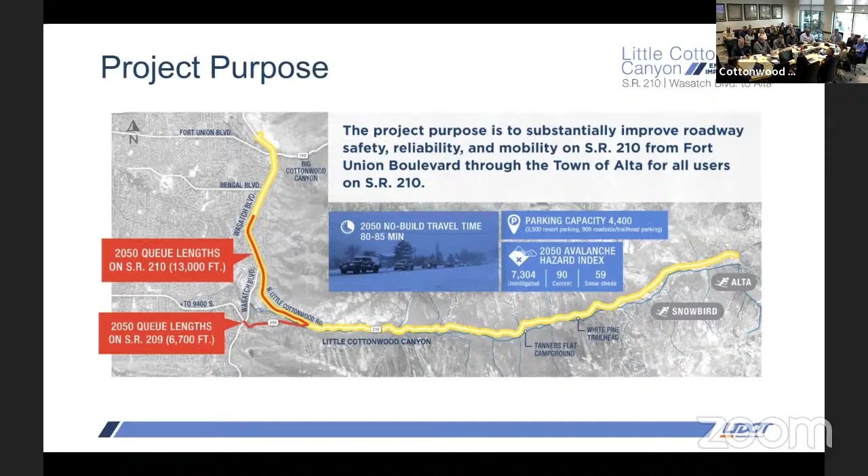I think you're familiar with the 5 alternatives that were proposed and analyzed in the draft. I think it's important to note that these were all measured off of a no action alternative, right? So if traffic continued to grow, population growth, but there were no mitigating activities. So that's really what we compared it against.

On the draft, we got over 14,000 comments. I personally read every single one of them. We responded to every single one of those. Those are all included in the draft. Overall, there was close to 80,000 different comment codes that were used. I mean, obviously some of them were used repeatedly, but about 80,000 comments that warranted response over 14,000 submittals. And the two that I really want to point out were, one, support for tolling. I was pleasantly surprised by the support for tolling in the canyon. And then the second one was support for phased implementation.

Some of the revisions, I just want to go over this quickly so people know what changed from the draft to final. The two bus alternatives: there will now be a bus stop located at entry 1 near the Creekside Lodge. It's basically right where the existing UTA stop is. It's really just a shed now. This would be an enclosed building with locker space, a place to put your boots on, get warm, store your lunch, and honestly wait for a bus down at the end of the day.

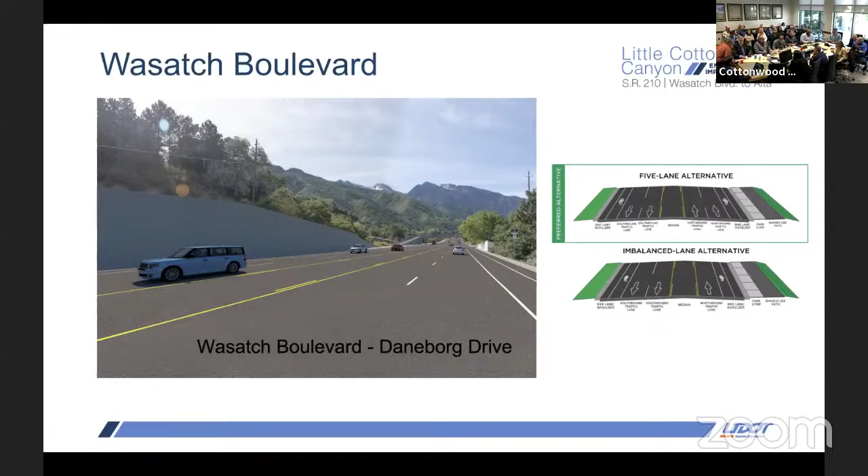Avalanche mitigation. I'll go through this pretty quickly. Anybody who's a skier knows that Little Cottonwood is one of the most dangerous roads in North America, unmitigated. On average, it has a closure of 56 hours per year, and that's over about 11 days. So average closure is 4 to 5 hours. Last year, we had a pretty calm year. The 2 prior years, we had individual closures in excess of 60 hours, right?

It was unfortunate that we had a Snowbird ski patroller that had some problems during one of those. I compliment the emergency services that got him to where he needed to be. But this is a real hazard. We've heard the Alta's running out of food story, right? I mean, these long duration closures have an impact for the canyon.

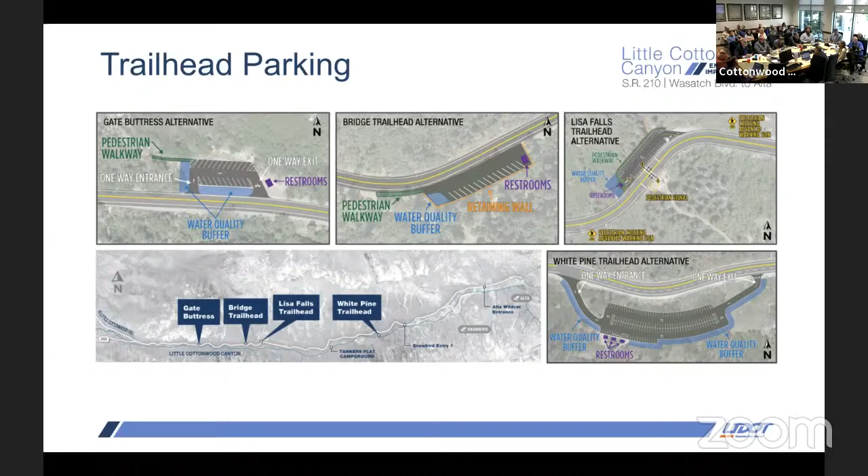Trailhead parking. So we are proposing to improve 4 trailhead parking lots. These are the Gate Buttress, Lisa Falls, White Pine, which is going to nearly triple in its total capacity, and a new one called the Bridge. As part of this, we would eliminate roadside parking within a 1/4 mile of these locations. They'll include water quality buffers, parking in stalls. If you're familiar with what the new Grit Mill looks like, imagine more like that.

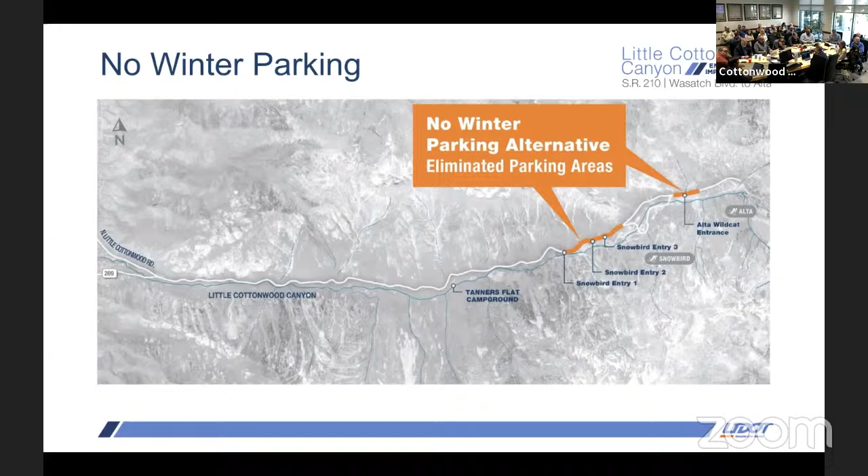Really reduces erosion and improves water quality. That being said, it also reduces a couple of stalls. Not much, 528 total to 511. Eliminating parking in the upper canyon. This is really roadside parking parallel to the white line between Snowbird Entry 1 and Entry 4, and then around the Wildcat area.

Public comment period. We have 13 days left. October 17th is the end of the public comment period. As of this morning, we've received 5,353 comments. I have not read them all. Please don't ask me to say what the prevalent theme is in this. You heard me say that yesterday, Mayor. I don't think that's fair. One, they haven't all been submitted, and two, I haven't even read all the ones that have been submitted. So we will compile some themes once the comment period is over.

But please, as citizens, as a city, take some time to formulate your thoughts. What we may have missed, what's wrong with our analysis, what can be done better. I do want to emphasize that this is not a vote, right? This isn't a ballot referendum. This is an opportunity to improve the process and come up with the best alternative that we can.

Moving forward, this is my last slide. The comment period will end on the 17th, after which we will read, review, consider all those comments. We will make any changes that are required as part of those comments, any additional evaluation, engineering, whatever we need to do. And we anticipate releasing a record of decision, which is the final step in the EIS process, really around the end of ski season.

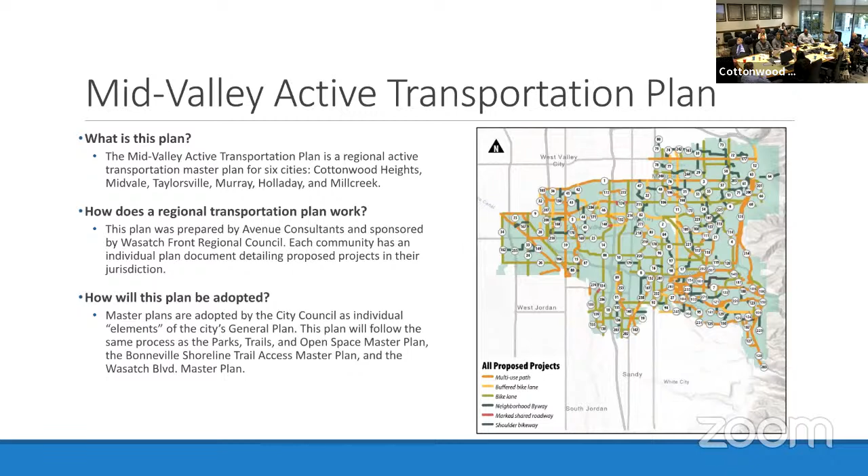And I want to go to this picture here. It's kind of hard to see with this kind of mess of lines here, but you can see Cottonwood Heights compared to some of these other cities. We have a pretty dense network of recommended bike lanes. So it's pretty extensive. I'd say our city is well represented in this plan, which is good. And you'll already notice, while some cities have adopted, we're still in the process of it.

We've proposed recent grant funding for some of these backbone networks, which we talked about at the last meeting, which is that Union Park, kind of Fort Union cycle track improvement, Highland Drive to Bengal. Those have been contemplated and partly awarded already and are under application again. And then Fort Union as well, we've seen some movement there. So having this plan in place will only help us continue to seek funding and try to prioritize implementing this.

You can describe multi-use. The orange one, that's one. Level 1. It's level 1. It's not necessarily strictly defined as one of these over the other, but it's something. It's a bike lane or a pathway that is on the road. Physically it may be on the roadway, but you can see those first two. One is a raised curb, so it's physically separated, or there's medians or planter barriers or something like that. There's a barrier between traffic and active transportation.

So right now, we do not have any of the cycle track at grade protected with parking. We're a mix of a little bit of buffered bike lane, a little bit of the bike lane in level 2, and then the shoulder, which as cyclists going on any one ride, you could experience all 3, actually all 5 of the ones on the left. Sure. At any given moment.

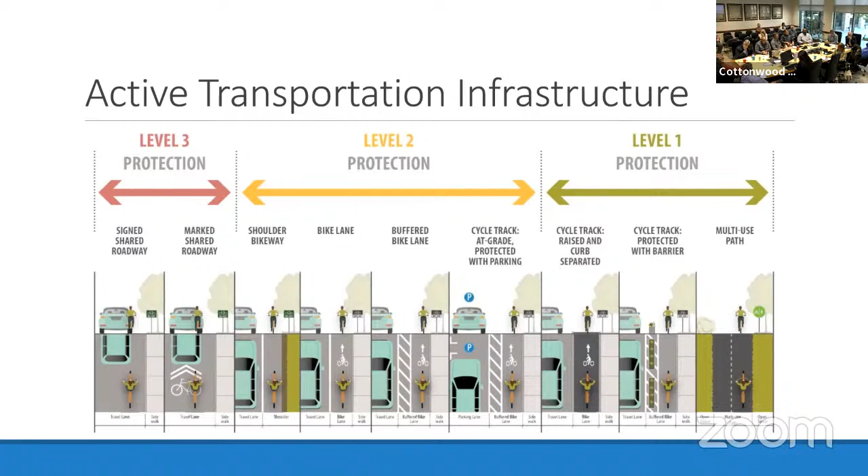Correct, and then at Brook Hill Drive, the other new development down there has that as well, which is just past the fire station to the east. And then, like I said, we have funding to pursue that and construct it between those 2 projects. It's a start, admittedly, but we are seeing that gain a little bit. Yeah, the Big Cottonwood Canyon Trail is a really good example that goes quite a ways. And then obviously the orange, that would be an orange line here. We're proposing orange lines in many different places in the city. So this is something that's maybe a more recent priority, but definitely a point of emphasis.

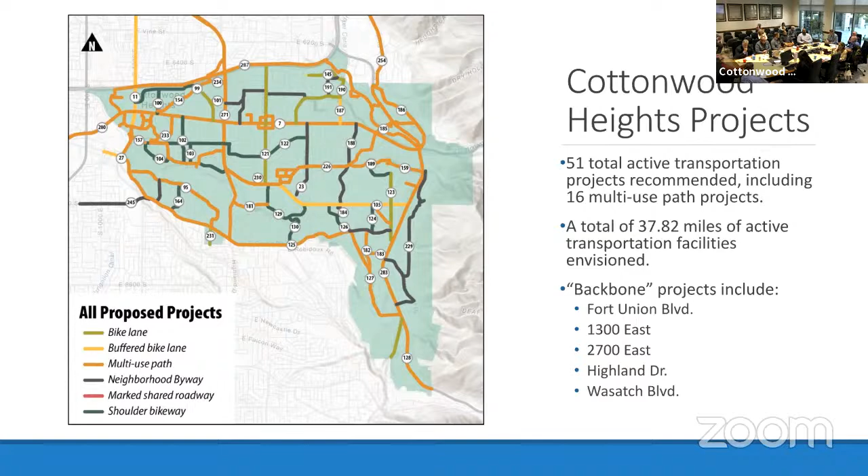Great. The plan is to present this for public hearing at the next council meeting or public comment. And then it'll just be ready for the council to take action on after that point. So, as soon as November. A full plan has been available on the city website, so it's there. If there are any questions, you can let me know. Okay. So the plan is a public hearing for our next council meeting. Correct. Okay. Awesome. Thank you, Mike.

Whatever we choose to submit goes into the larger plan, or this is what we've said? They've adopted, they have the whole kind of larger plan online, and then the formal adoption is just each of the 6 cities adopting it. Okay. And it has city specific references. So my understanding of the Mid-Valley, the regional plan, the only thing that interfaces with Cottonwood Heights at all is on the very northwestern edge of our city. Am I mistaken on that? I just want clarification that right now, the Mid-Valley Transportation Plan, not Cottonwood Heights, not the one you're showing here. This is from the plan.

Okay, but what I'm understanding when I look at the Mid-Valley Plan is if this is Cottonwood Heights, the only connectivity that we have to any of these other cities is either if you're on the Big Cottonwood Canyon Trail and you end up in Holladay, then you come up onto 6200 South or onto Murray Holladay Road, or on the very western edge of our city. But in terms of safe, active bike routes on any of our collectors, our arterials, at this time they don't exist. This is all future. So I just want to make sure I understand.

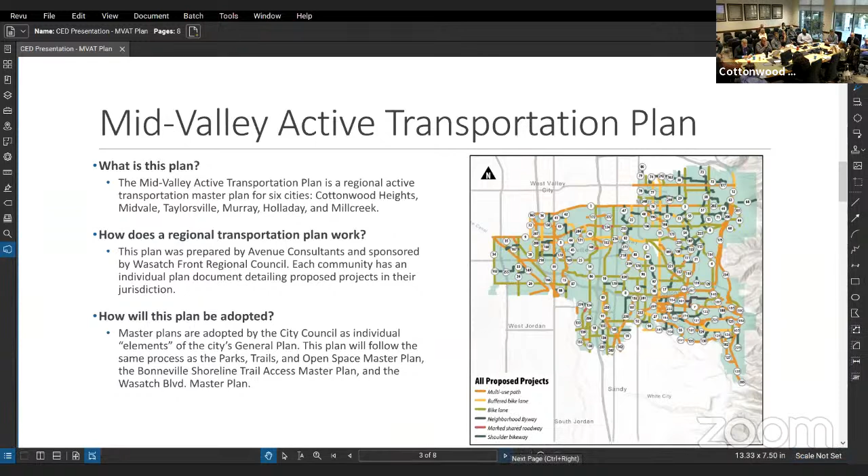So you're going to be asking for public input on the entirety of the Mid-Valley, or also on what Cottonwood Heights is looking for within our city boundaries? Well, both. And then like I showed, we do have the city version here broken out. So this is what this plan proposes within our boundaries, and then it connects to the greater network as well.

So as a cyclist myself, what I am not seeing is a prioritization of how we connect, for instance, neighborhood byway routes, so that people can safely ride throughout our city. Right now, I hate to call it a hodgepodge, but that's what it is in my opinion. And so can the plan be improved to show some kind of prioritization or approximate timeline? It seems kind of like a shotgun, like here's 30 things we hope to do, but it doesn't have a

prioritization or timeline. Yeah, I think with a regional plan like this, the prioritization of it would come down to each local municipality. No, I'm talking about for our city. Because right now, for the regional bigger picture, we're starting to dig in a little bit there, but for our city is what I'm talking about. He's saying that we can prioritize however we want. I think the plan will lay out this network. So we can, yeah.

I think the priority of the plan, honestly, is regional, right? So it's these backbone routes, but then we will have an adopted plan that has all these routes at the city level, and this council can prioritize that and implement that any way it wants. But that's not what we're focused on in the next couple weeks. The Mid-Valley plan on its own, these are the 4 goals of the adopted plan. Prioritize safe routes for all, which is broad, but really to complete those backbone networks.

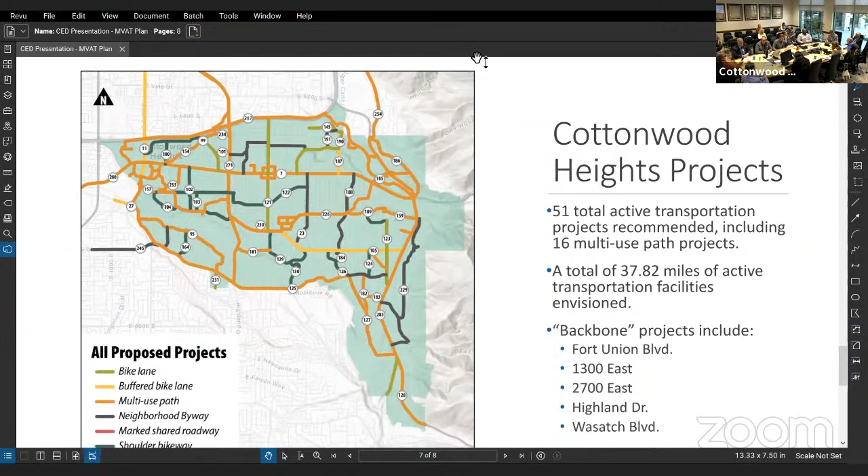Well, I see very recent progress on this. It's not there today, the bike network, but we've got 2 projects that we're funding. Funding's gonna be another. So we're gonna talk about a solution to not being so rushed, but unfortunately, we have to move on. Thank you, Mike, I appreciate it, and we're gonna go to Matt, our Public Works Director, who will talk about the Big Cottonwood Canyon Trail project.

Okay. So Mayor and Council, a couple of years back we received a TRCC grant from the county to do some improvement on the Big Cottonwood Canyon Trail. Through COVID and some funding things that happened, it got canceled for a while. Then it came back, and we're finally getting around to this project. We received approximately $84,000 to do repair and maintenance on the Big Cottonwood Canyon Trail, and the location is from approximately 215 behind the corporate center.

And you can see right here, this is the fish shop. I don't know what they call it. Market Street? Yeah, Market Street. And then from there, it goes... I'm not gonna get into it, never mind. And from there, it takes it up to 30th East. That was the original plan, in this location, as you can see. So everything west of 30th East was in the original reconstruction.

When we went out to bid, we wanted to take a look at the rest of the trail and what we could try to improve as we went along, and we put it out for bid in different phases. One of the other phases on the east side of 30th East, you can see that it goes behind the center here, the commercial center. And then right down in this location is the pond, to give you an idea of where we are. It goes behind the shop, the UDOT shop, and it ends up right there at the pond.

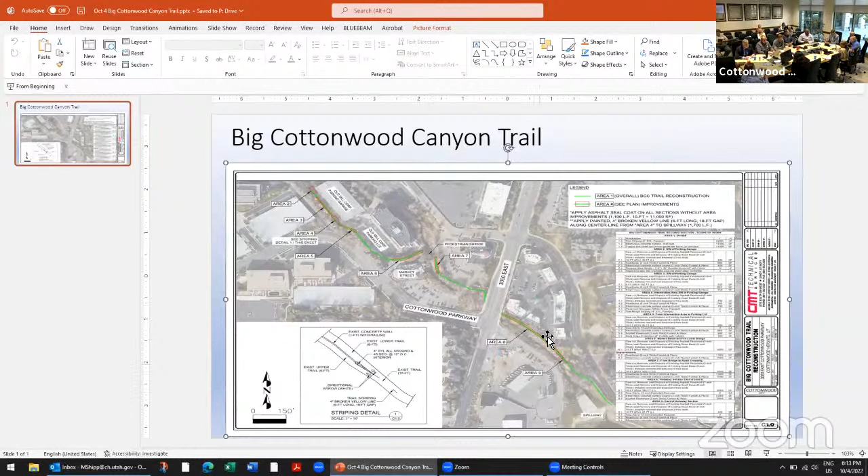You're welcome. Appreciate it. So before I get to the review of calendars and upcoming events, it's stressful on my end to get us through this work session. I think we have enough going on. I feel like maybe moving our business meeting back to 7 and giving us 3 hours. There might be a meeting or two where we have more time to sit in here than usual, but my suggestion would be to move the business meeting back to 7 to give us a little more time without feeling rushed. As of next meeting? That's a good question. We would want to get it on social media and published to the public as soon as possible. We can't do it today.

No, I know. Well, I would enter a motion to start the business meeting at 7 PM starting in November. We should have action in. Yeah, it's not a motion, it's a consensus. So that might not be a bad idea. We'll go one more meeting at 6:30 and then, unless anybody wants to talk to me about it, we'll go at 7 o'clock beginning in November. That sounds great. And like I said, we're not there yet. That's just my suggestion. We'll get a consensus before then. Yeah, I'm fine with making that change now.

Review of calendars and upcoming events, thanks Scott. Monster Mash will be held on October 28th from 5 to 7 at the Cottonwood Heights Community Recreation Center. Trunk or Treat will be here at City Hall on October 31st, starting at 3. Light the Heights will be held on November 28th from 6 to 9 at City Hall. Future city council meetings: October 18th, November 1st and 15th, December 6th and 20th, starting at 4 with our work session, followed by our business meeting. Future planning commission meetings: October 5th, 19th, and November 2nd, starting at 5 unless otherwise noted.